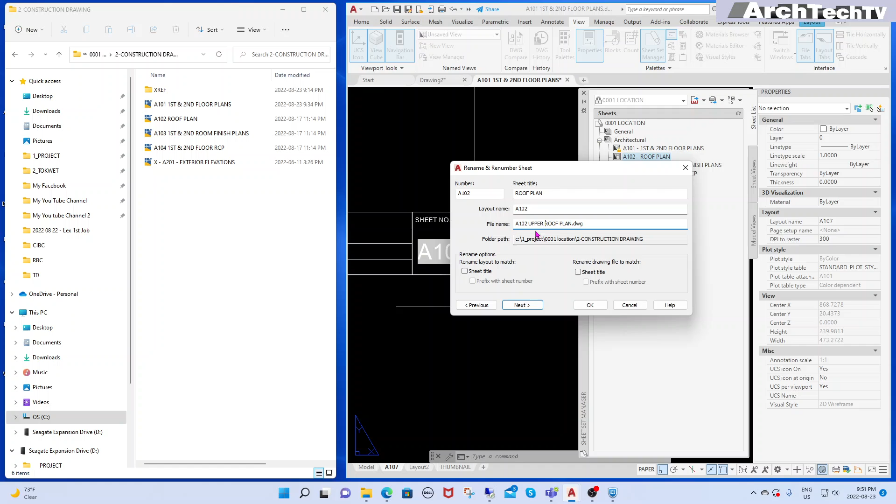Then, okay. So, ayun, nagbago siya dito. 102 upper roof plan. So, that's how to rename the file name using the sheet set manager.

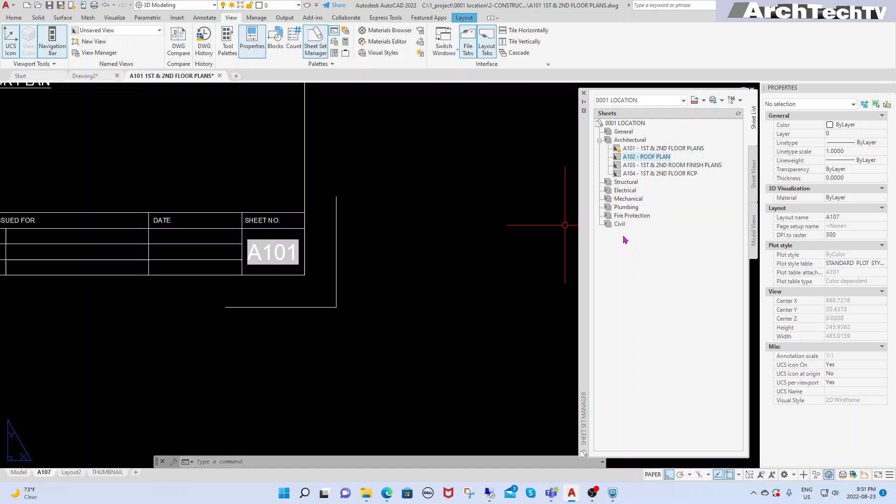Isa pa ay ang pag-rename ng layout. Pwede rin i-rename dito ang layout. So, nasa tayo? 101. First and second floor plans. So, gagawin natin dito, i-rename natin itong layout. So, ganoon din ang gagawin. Right click. Rename and renumber. So, nakalagay dito ang layout.

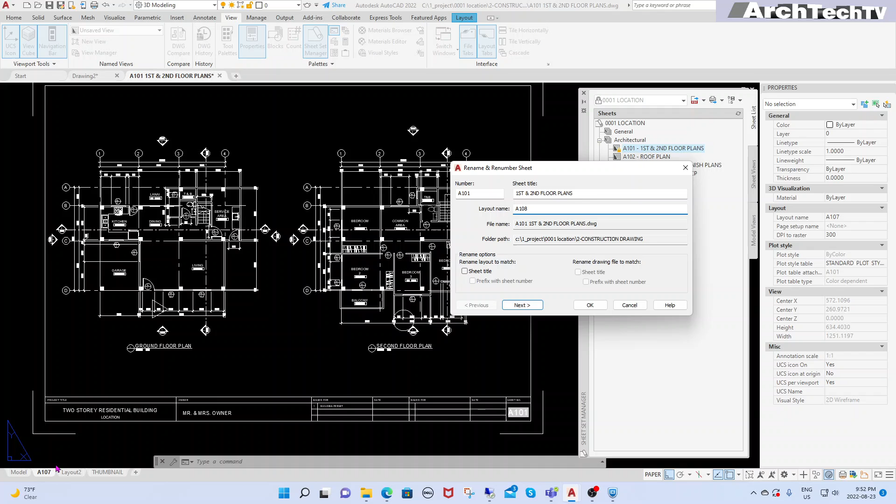Let's say you want to change this to 108. So, masdan nyo itong 107, magiging 108. Magic.

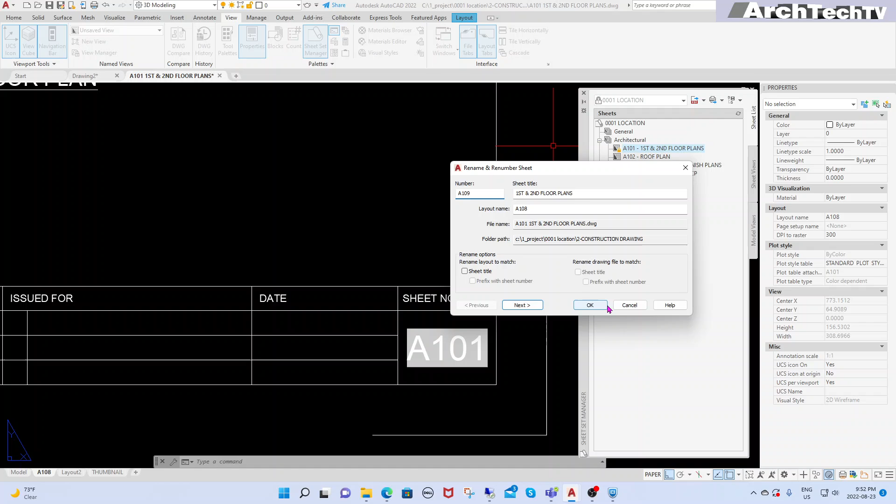Isa pa, kung gumagamit kayo ng fields. So, itong fields na ito ay nakakonect sa sheet set manager. Pwede nating i-rename ito dito sa sheet set manager. So, right now is A101. Rename and renumber. So, ito yung number niya, A101. Kung gusto nyong palitan ng A109, pwedeng palitan. Okay. Then, all you have to do is regen. Regen is 109. Yun.

Ano pa? Meron pa. Isa pa dito. Let's remove first. Remove location. So, meron ditong under model views. Meron ditong naka-default na add new location.

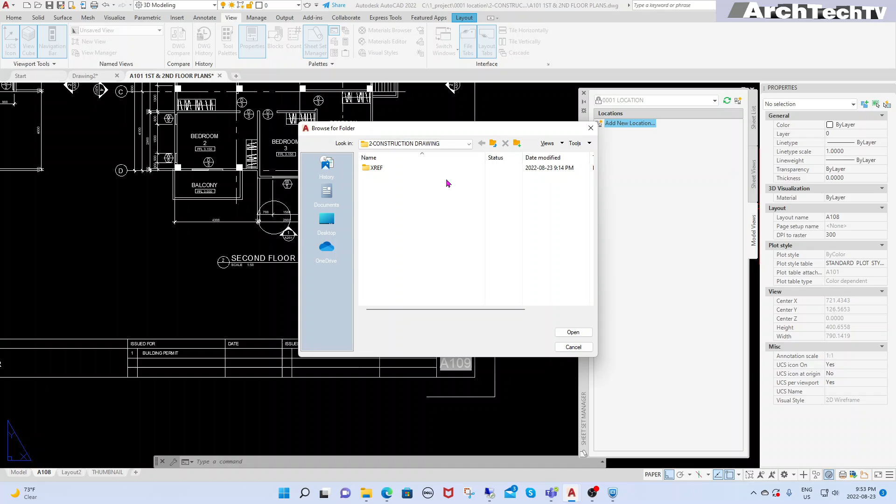Pwede tayo mag-add new location kung gusto nyo i-add ang, let's say, yung mga file sa Xref. Kung gusto nyo makita yung file sa Xref dito sa sheet set manager, i-add nyo lang yung location ng mga Xref files. Then, from here, pwede nyo ring i-open dito. So, just double click.

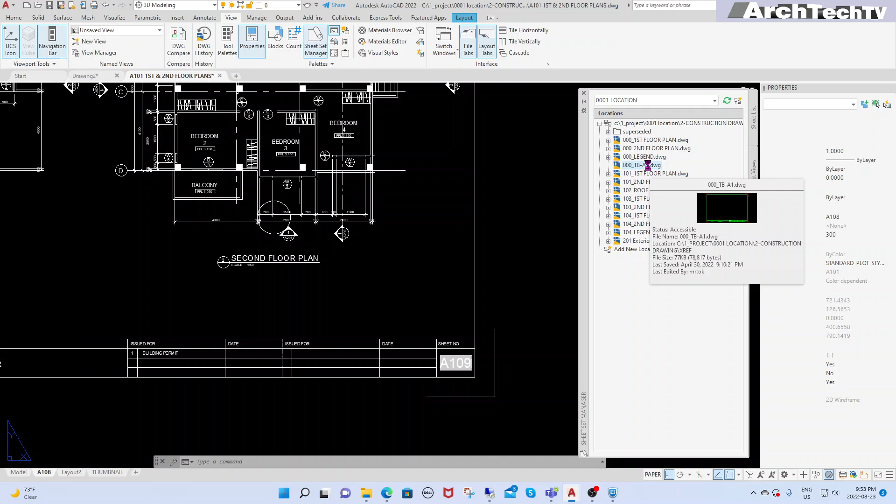Let's say this one, title block. Double click and the file will be open. Yan. So, that's it for now.